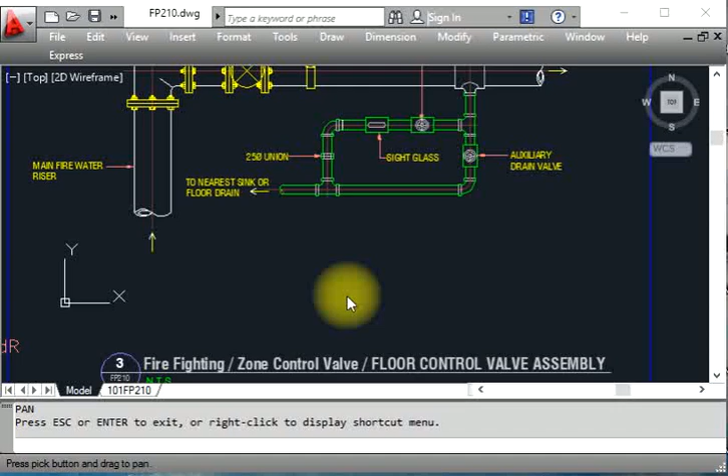I brought the video for a firefighting zone control valve, or you say floor control valve assembly.

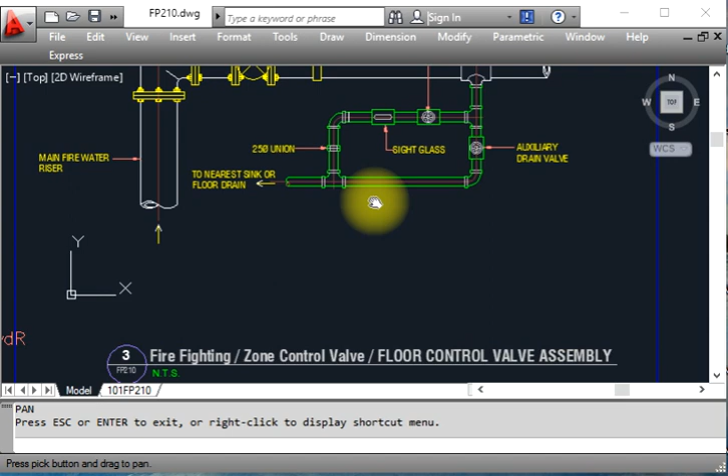So basically, in firefighting layouts, in sprinkler layouts especially, we use a zone control valve or control valve assembly. So what is the function of this zone control valve? I will explain first. This is a main pipe for firefighting, so we have to divide it by floor. When we go into the floor, we have to provide a zone control valve. So what is the function of zone control?

Basically, when we have a huge project or we have more than thousands of sprinklers, we have to make zones in firefighting. I will explain in firefighting drawings as well what the zone control is and how it works there. So I'm just telling the summary of the zone control valve. We cannot keep all sprinklers in one pipe like that, so we make the zones. For example, we have thousands of sprinklers, so we make two or three zones; 700 sprinklers up to 1000 we can put in one zone control.

Or we have a high-rise building, 50 story, 64 story, 20 story, 11 story, or 10 story. On each floor we have to provide a zone control. We have to control everything. We have to close the gate valve, and we check the status of the firefighting. We have to provide an OS&Y valve and many things. So this is the function of the zone control valve.

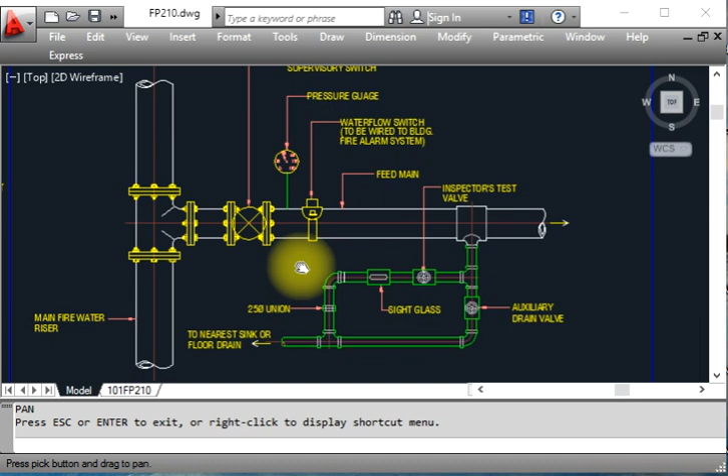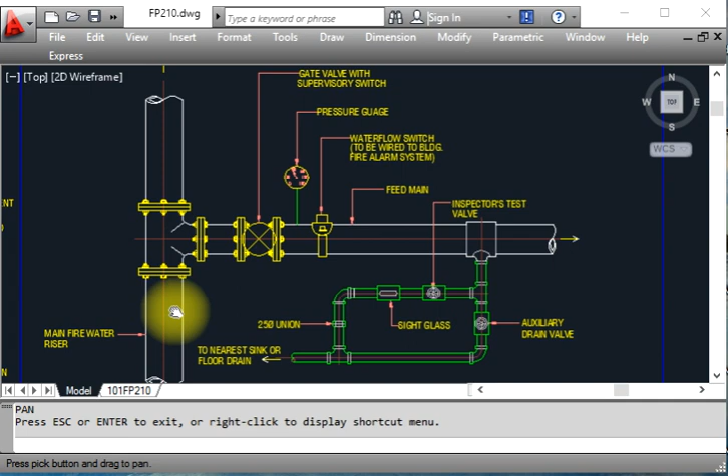Basically, we have to isolate the area. For example, we have 1000 sprinklers, so we make 700 sprinklers to each zone, up to 1000 sprinklers, or by the area as per the design. So let me explain the zone control valve. What is this? This is the main pipe of the zone control, main pipe or riser, you say this one. So this dia is more than 10 inch or like that, so 110 or 200 mm.

So here we have to provide flange type fittings. See, this is flange type. Flange type fittings we will not keep after 2 inch. So this is a flange type fitting. See, this is bolted, and we have to keep the rubber inside here. After that, they're going to the zone.

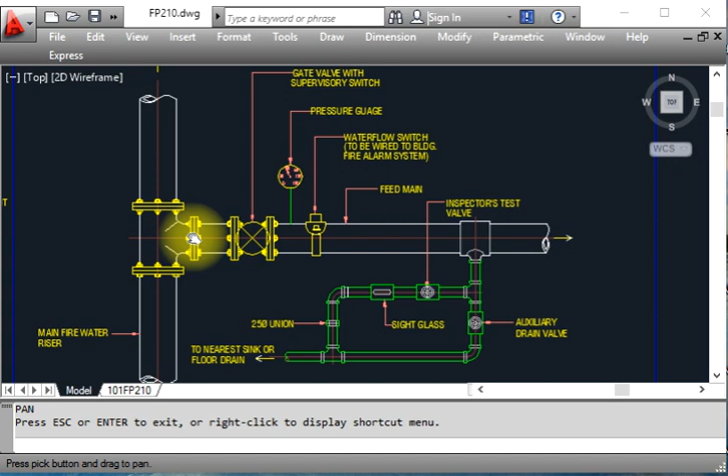For example, this is a high-rise building, so it is going to the 6th floor up to the 8th floor. So on each floor we have to make the zone. So this is going to the floor, for example, so we have to provide the union with the flange, because this is a huge dia. So we have to provide flange types. After that, we provide a gate valve with the supervisory switch, this gate valve.

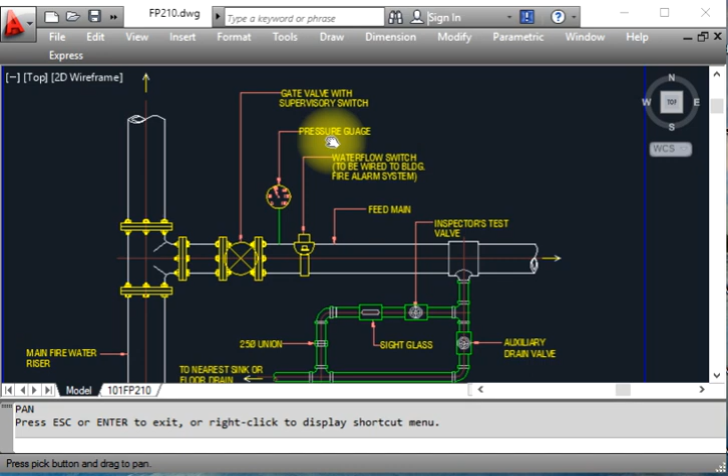Or you say this is an OS&Y valve, a gate valve type of OS&Y valve. With the OS&Y valve, we can understand visually whether it is open or closed. So that's why we use the gate valve in firefighting as an OS&Y valve. After that, we put the pressure gauge, to see how much pressure is coming. We have to maintain the pressure here from the gate valve. So this is the water flow switch, for the fire alarm system.

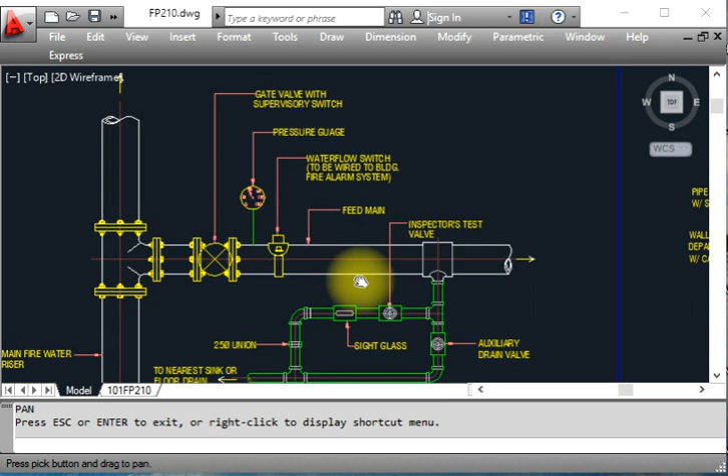To building, this water flow switch will be connected with the BMS, building management system, and will be controlled by the BMS. So this is the feed main going here. This is going to the room, or the floor, and all the sprinklers will be installed here.

In case of any water leakage problem, we have to remove the water from here. So this is a drain valve installed here, and this is the inspector's test valve. We have to get the inspection from here.

So how the water is, or what is the pH level of the water, we can check here. Whatever pH level we need, we have to check with the laboratory test. We'll detail about it. So we can see here the sight glass, we can see water from the glass as well by visual, and this is going to the union, and this is going here.

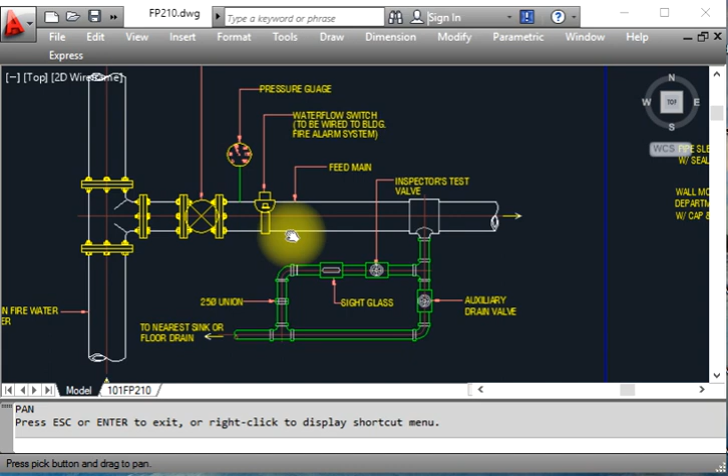This is a small pipe, this is threaded, and this is threaded as well. If this is a huge dia, more than 2 inches, we're using a flange type. So this will go to the nearest drain or sink. We have to provide the floor drain nearest on the floor, and we have to provide the pipe.

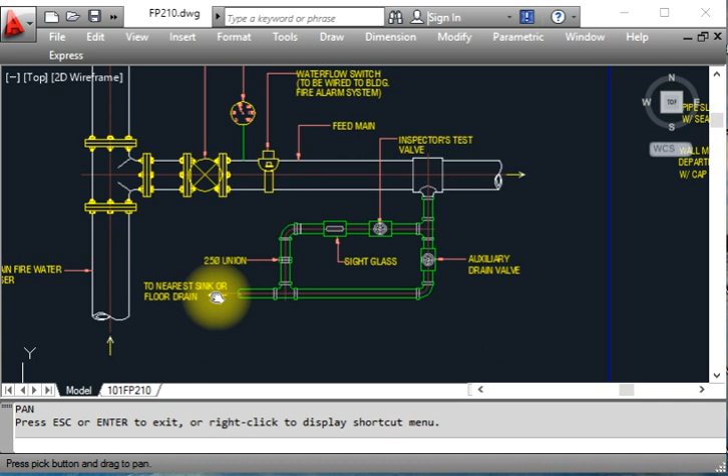So this water will be drained to the floor drain, because on the floor we must provide the floor drain. By the slope it will be drained here, because we provide a little bit of slope only, so water will not be retained in the pipes.

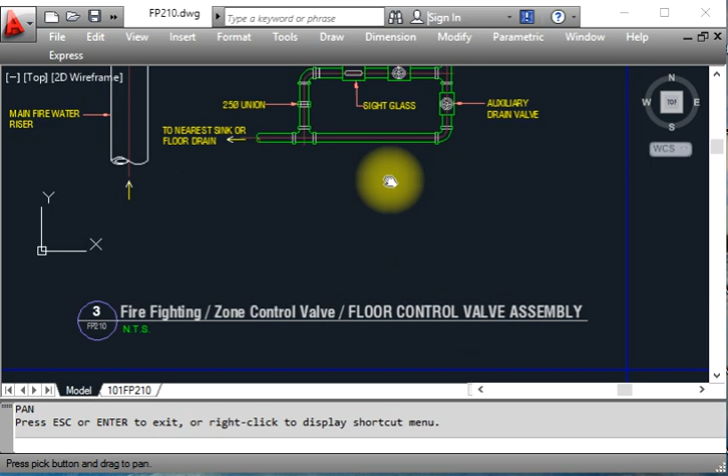So hope you understand what the firefighting zone control valve and floor control valve assembly is. I will repeat the functions of the zone control valve. Basically, the zone control valve controls the zone. A zone contains more than 500 or 700 sprinklers each floor. If we have a huge parking area, we have to divide the area by zone: zone 1, zone 2, zone 3.

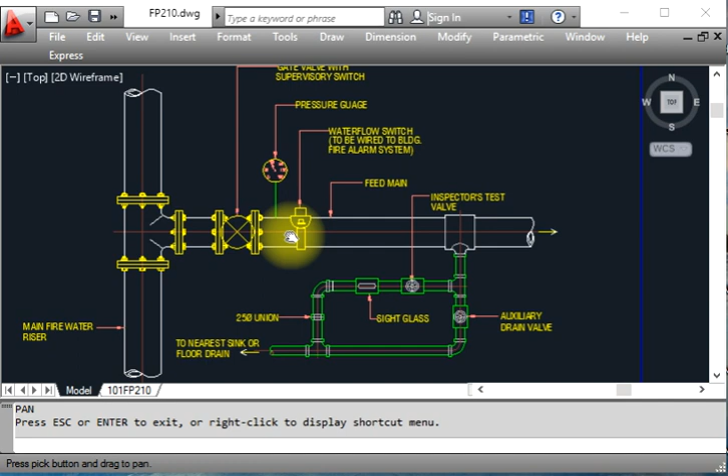For maintenance purposes, for drain purposes, and many things we have to do in engineering, we can easily drain, test the water and everything. So we have to provide the zone. And as I mentioned earlier, we use this for high-rise buildings, even 2 floor, 3 floor, 4 floor, each provided with a zone. So each floor has its own control valve, which we call the zone control valve.